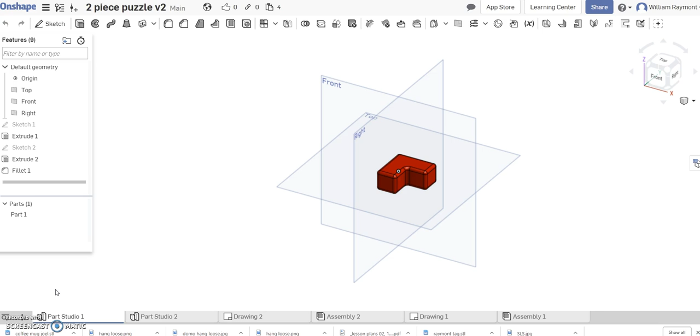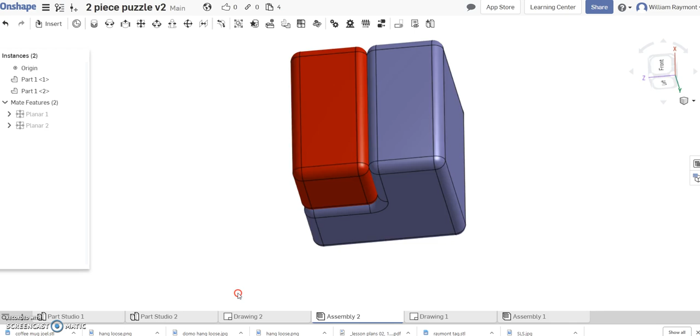So here I am in Part Studio 1, and here's the part from Part Studio 2. I'm going to combine both of these into what's called an assembly. So here you can see an assembly where the parts have been joined together the way you would when you solve this very simple puzzle that we've created.

Okay, so the idea is that what you're learning in these videos, you're going to apply to your 5-part puzzle cube that we're creating with our teams. So let's get started building our own assembly.

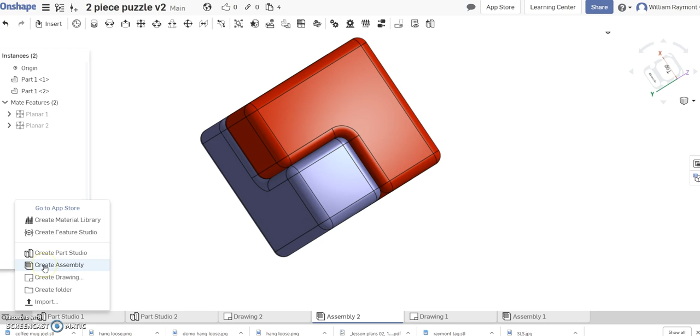You can see that this is assembly 2 for me. I've got an assembly 1 because I've been practicing with this quite a bit. Okay, here we go. Anytime we want to create a new page in our document, we come down to the plus in the lower left-hand corner, and we are going to create an assembly this time. So create assembly. I'm creating assembly number 3. For you guys, this should be assembly number 1.

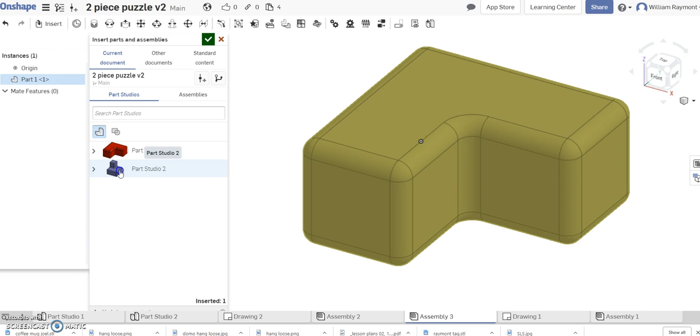Okay, so the first thing that we need to do is insert our parts. So I click on Insert, and it gives me this list of part studios that I can import. So I'm just going to click on Part Studio 1. There it is. Part Studio 2. There it is. And now we can see that they are aligned, but not the way we want them aligned.

We need to basically solve this puzzle in the virtual world. This is a really valuable tool in Onshape. You can build parts that are meant to work together, and before you go and print them, make sure that they actually do work together by creating an assembly. So let's start.

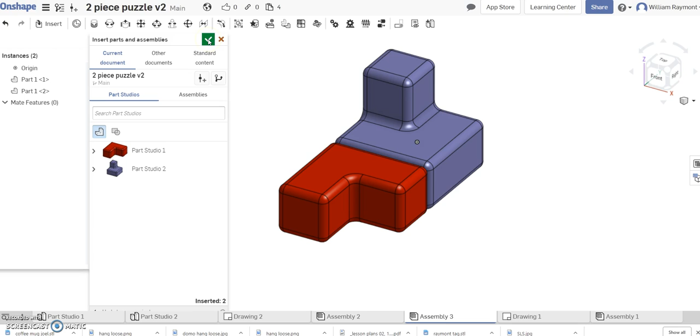I don't know why it's moved. Okay, let's start by clicking the green check mark. Okay, and now, as I have played with this, I've gotten better at it. At first, I was having a lot of trouble, and now it's working much more easily for me. So,

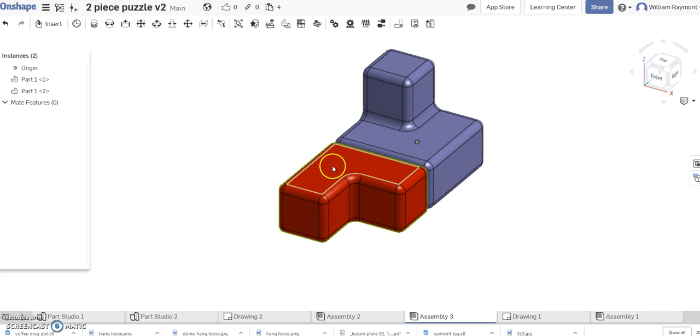What I'm going to do first is click on this part 1, and it gives me these 3 arrows and those 3 circles. With the arrows, I can move them back and forth. And with the circles, I can spin them. So let me click on one of those circles, and we're going to spin this

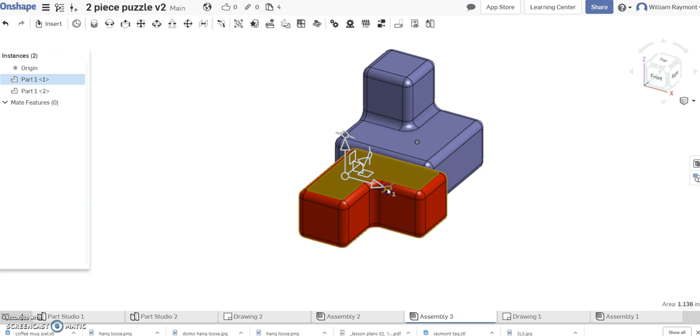180 degrees. So I'm just going to spin it a little bit, and then I'll type in 180. And that orients it to the direction it needs to point to pair up with the other part.

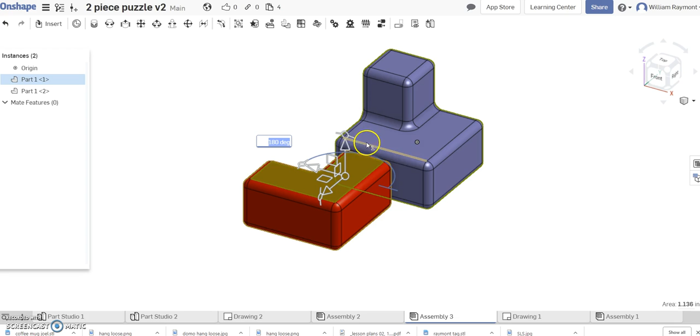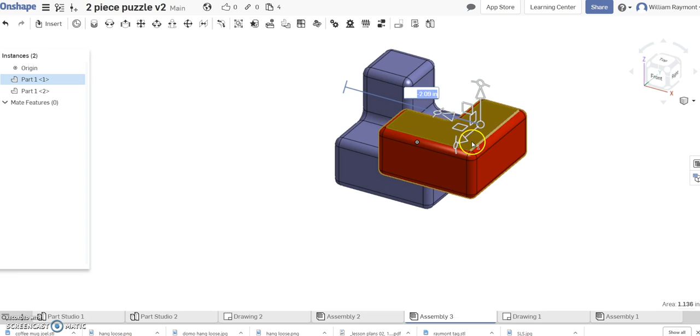So now, what I've found is if I get it floating out in space like this, I'm going to lift it up above where it needs to be. I'm going to move it to the right beyond where it needs to be. And I'm going to move it forward beyond where it needs to be. So, in other words, it's beyond where it needs to be in each of those directions.

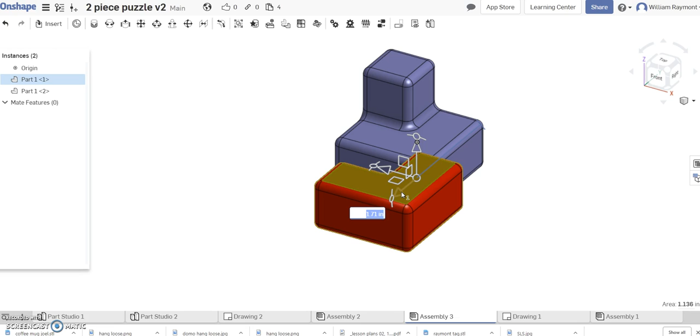So when I pair up 2 of the planes, all 3 of the planes that need to pair up will move to where they need to be. Before I figured this out, I was having to pair up every plane. Okay, so now they're just kind of floating in space to where they can all come straight together.

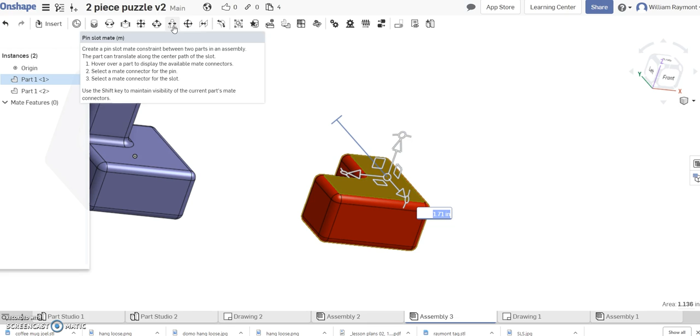Okay, so now what I'm going to do is come up here, and we've got a lot of tools up here for pairing different types of objects. Pairing cylinders, pairing pins that go into holes, different connectors, fasteners, pairing fasteners. But what we're trying to do is line up matching planes. So we're going to use this planar mate. So it opens that pop-up window for me.

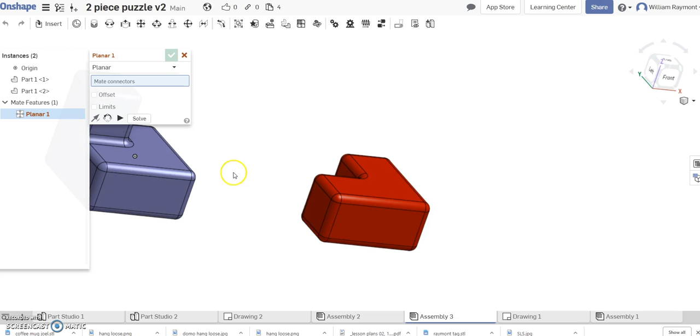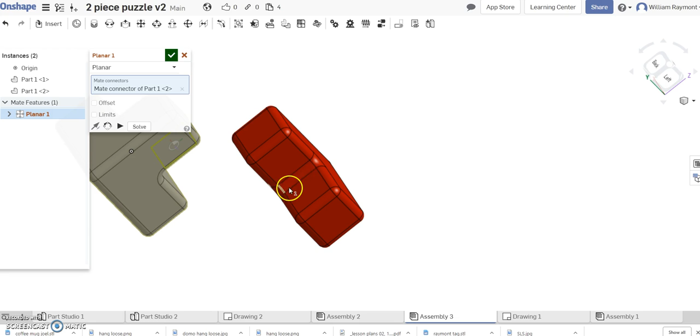Now, what I'm going to do is pick the two faces or planes that I want to align with each other. So there's one, and now I need to spin around, and the plane I want it to pair up with is this plane right here. So those are the two planes that I want to pair up. And notice all three planes, since I was beyond in each direction, have now paired up nicely.

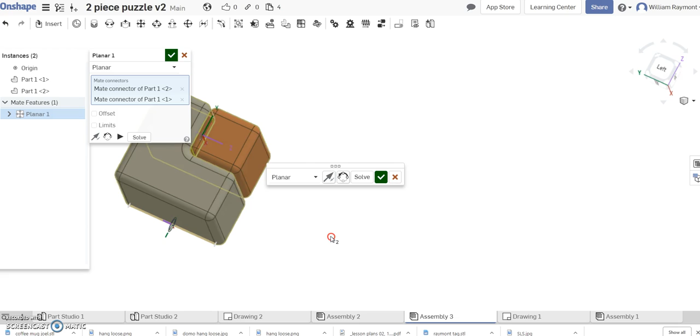So that's it. I've created an assembly. Until you practice with this, it may be more difficult for you, but it's really gotten easier for me as I've played with it. So, you know, don't be afraid to make mistakes. Try it. If it doesn't work out, undo it. Try again. Okay, that's all I can tell you.

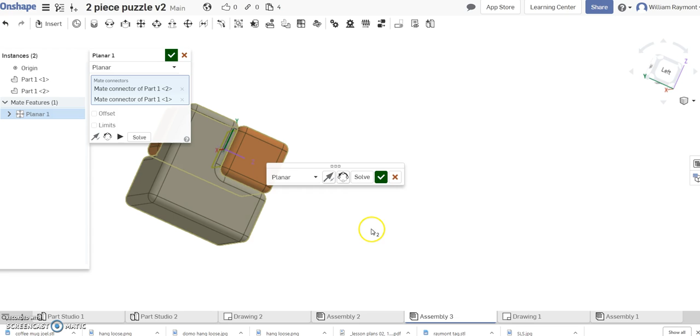So I'm going to accept this, and there is my assembly. Okay, now I'm going to close, let's see, planar 1. I don't need that, I don't think.

So what I want to do now, I think if I click on one, let's see if I can select both and move them together. Nope, I cannot do that. So I'm going to undo that. What I'm going to do is just, I want to get it more centered. So what I'm going to do is zoom out and then put my arrow on the side I want it to move away from. There we go.

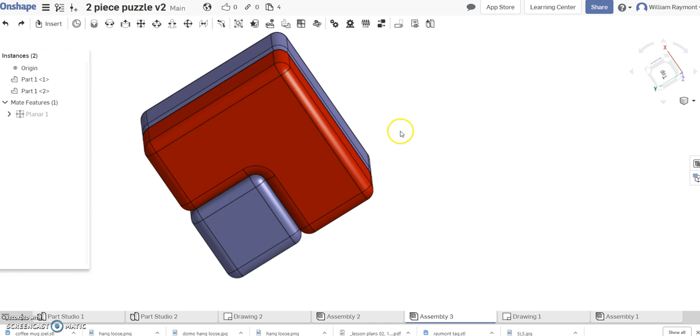That's pretty good. Okay, and now I can spin around and look at it from different angles. Let's get an isometric view here. There we go. Okay. And that's it for the assembly. You can make a drawing of this assembly now if you want.